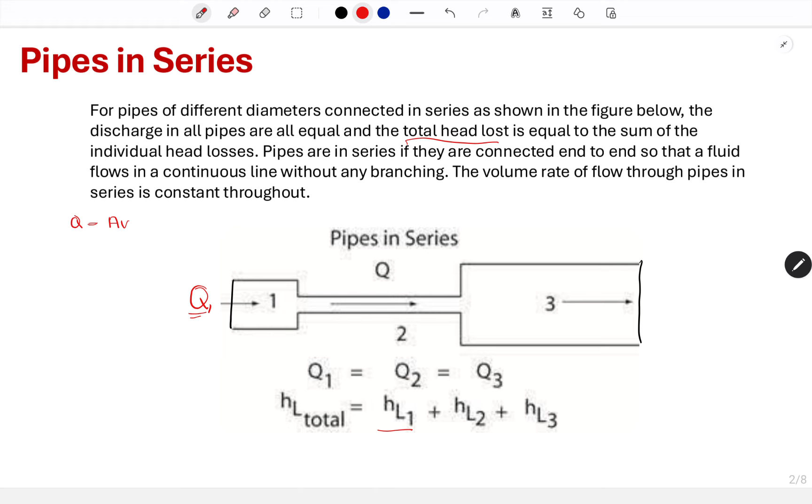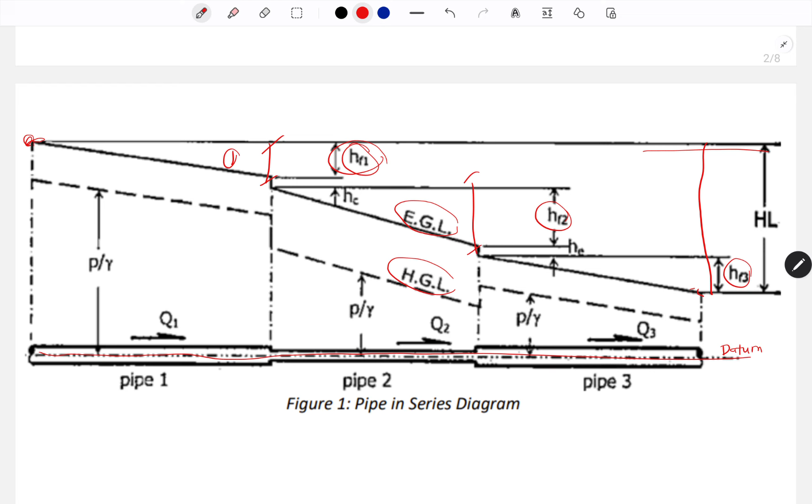So let's proceed with sample problem number 1. By the way, this topic under the hydraulics subject is very easy.

Let's proceed. Three concrete pipes are connected in series as shown - this is pipe 1, 2, and 3. If the rate of flow in the pipe is 0.10 cubic meter per second, first determine the total head loss of the pipe. Second, determine the length of the 200 mm diameter.

In our problem, a table is given with the properties of the pipes along with the friction factor. Since friction factor is given, which major head loss formula should we use among the three?

There's no other formula among the three with F, the friction factor, except the one we'll use here, which is of course the Darcy-Weisbach.

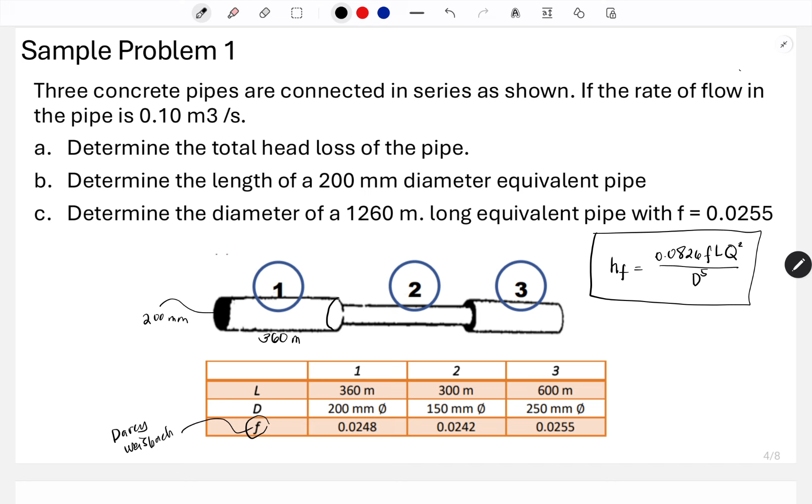For number 1, check this out. So first, what are we looking for? We need to compute for the total head losses.

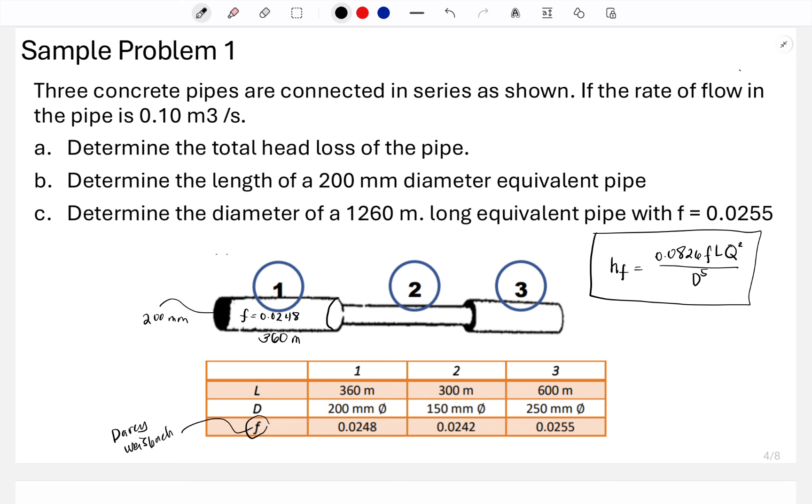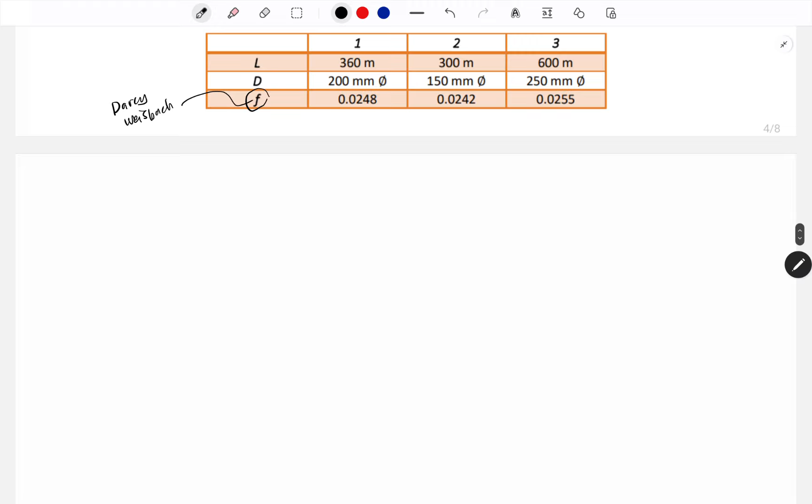For us to compute the total head losses, let's compute the individual head losses, which are HF1, HF2, and HF3. Let's put our solution here. Letter A, we have total.

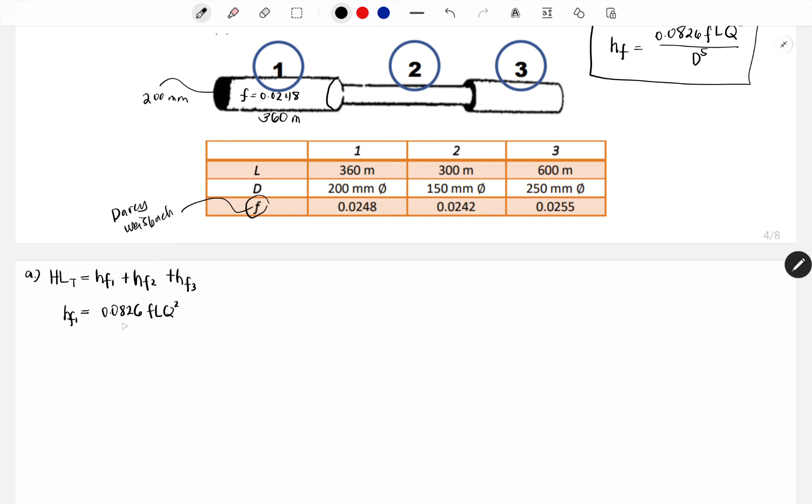We have HF1 plus HF2 plus HF3. So let me put the formula for HF1: 0.0826 FL Q squared divided by D raised to 5.

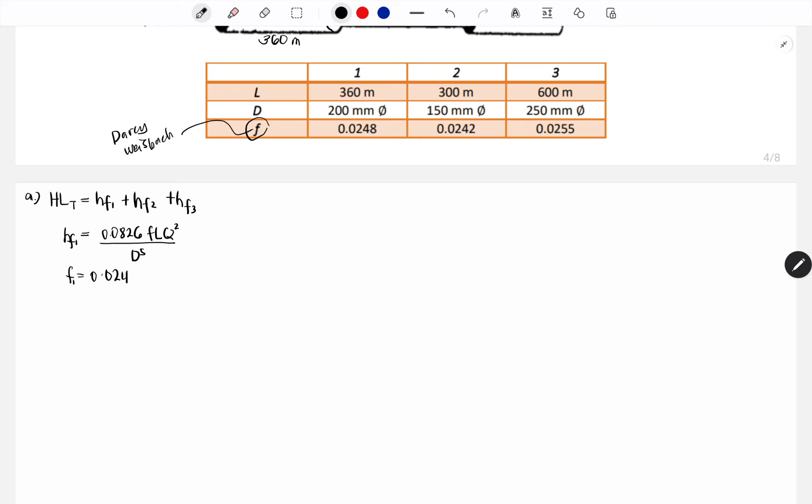So we have the givens: F1 is 0.0248, L length of pipe 1 is 360. For Q, we have a given that the rate of flow in the pipe is 0.10 cubic meter per second. Since this is series, Q1 is equivalent to Q2 and also equivalent to Q3, which is equivalent to 0.10 cubic meter per second.

So Q is equivalent to 0.10. And then lastly, the diameter is given as equivalent to 0.2 meters. So here, it's just direct substitution: we have 0.0826, F is around 0.0248, the length is 360 - make sure your units are consistent or uniform. 0.10, and in our case everything is in meters, so it should all be in meters. And then the diameter is 0.2 raised to 5.

So in our case, we can compute HF1 that is equivalent to 23.05 meters. So let's compute the rest, and I'll just put the answer here.

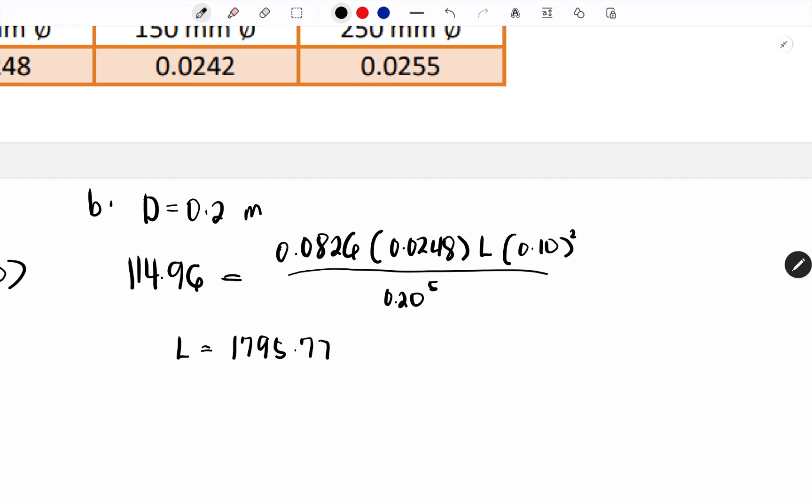This is equivalent to the formula of Darcy-Weisbach. The F we'll be using is 0.0248, since this became its equivalent - so let's use this too. But if there's a different given, that's what we'll use instead. The length is unknown, and the Q is the same, squared, and then 0.2 raised to 5. So L is equivalent to 1,795.77 meters. That would be the answer for letter B.

And lastly, letter C: determine the diameter of the 1,260 meter long equivalent pipe with friction factor 0.0255. Again, let's use our equation - the formula we'll use is head loss, since it's still an equivalent pipe. What we're looking for now is the diameter. So we have 114.96, and we're given the length - that's what we'll use - the length is 1,260, and the friction factor given is 0.0255.

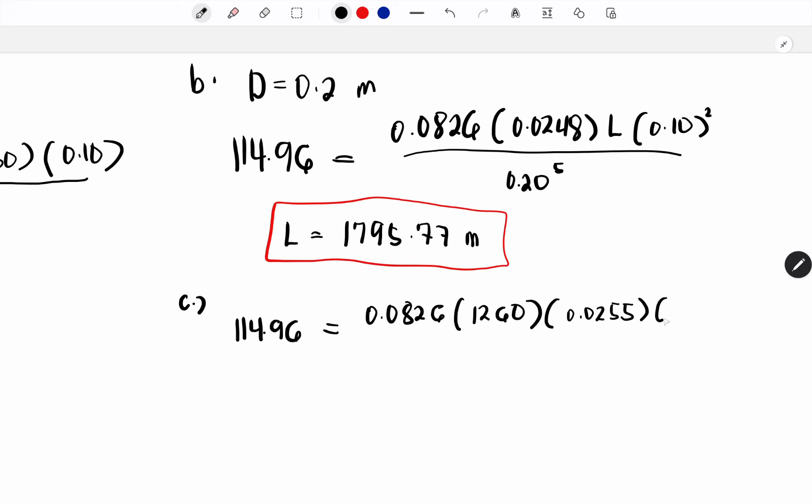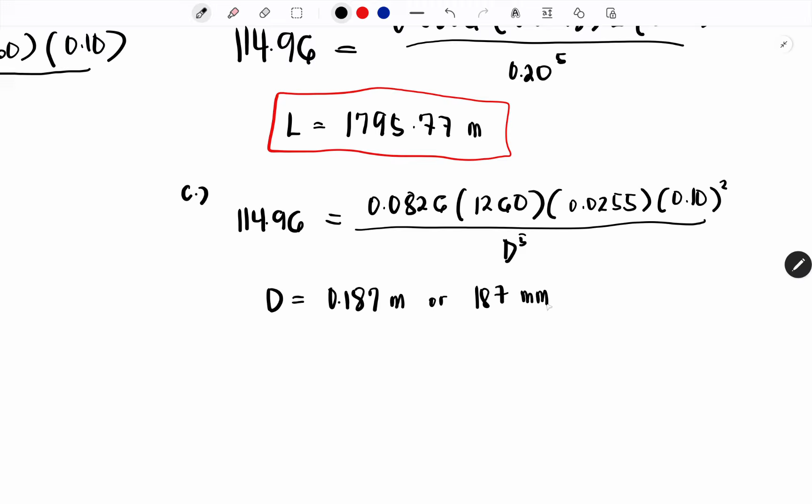And the Q is the same, so diameter raised to 5. If you solve or simplify, we get the answer of 0.187 meters or 187 mm. So that would be the answer for letter C.

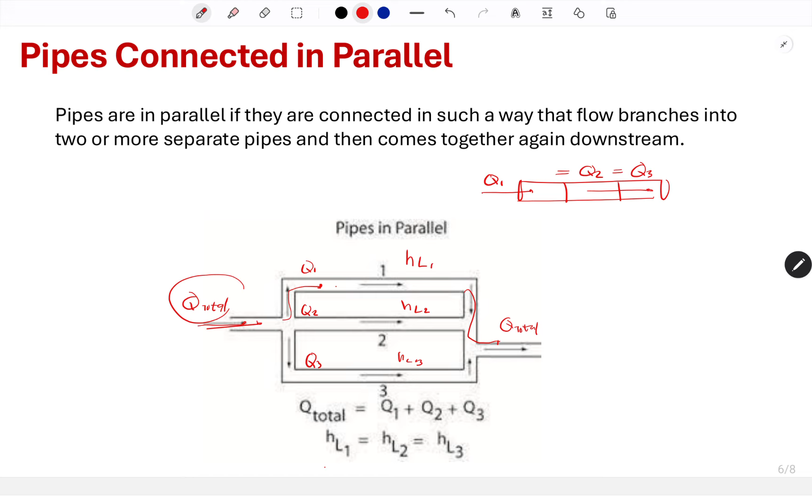So let's proceed with sample problem number 2. Let's just put up the page.

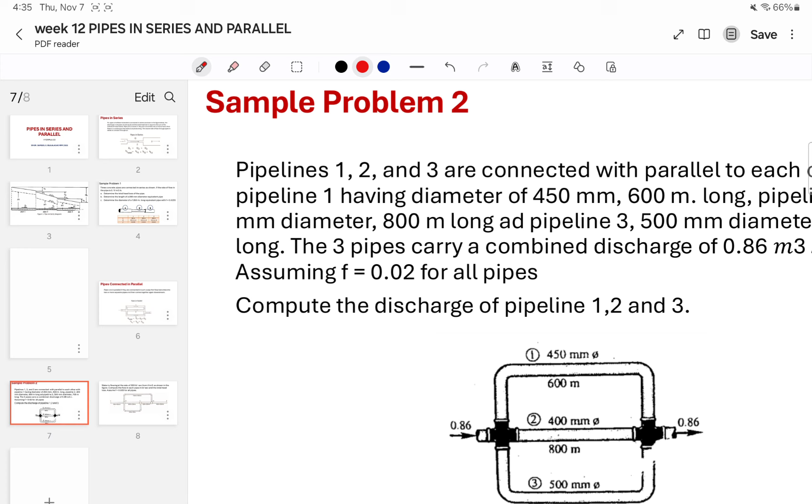So, the pipelines 1, 2, and 3 are connected in parallel. So we have a parallel figure. We just need to compute the discharge of pipeline 1, 2, and 3. But there's a value already given - we have 0.86 as the total discharge, 0.86 cubic meter per second.

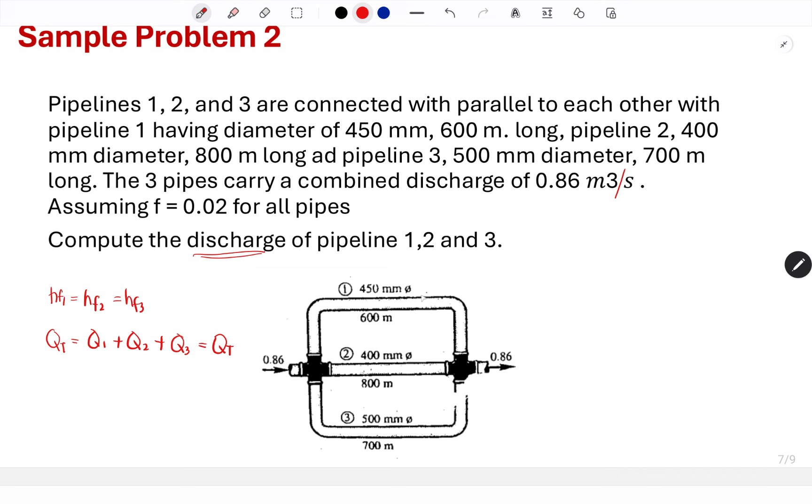So we need to compute the discharge, using the formula we discussed earlier. We have the total head loss, or the head loss at 1, equivalent to head loss at 2 and head loss at 3. And the Q total is equivalent to Q1 plus Q2 plus Q3. So how do we use this to compute the head losses in each pipe, and the discharge in each pipe? Let's write our formulas first.

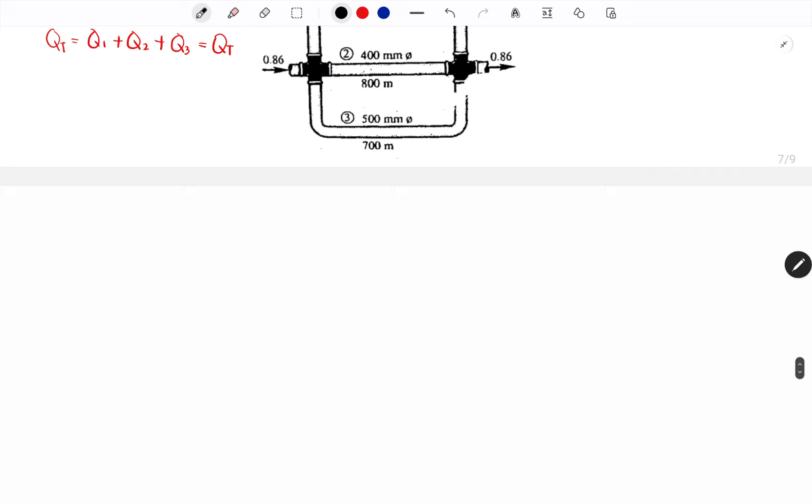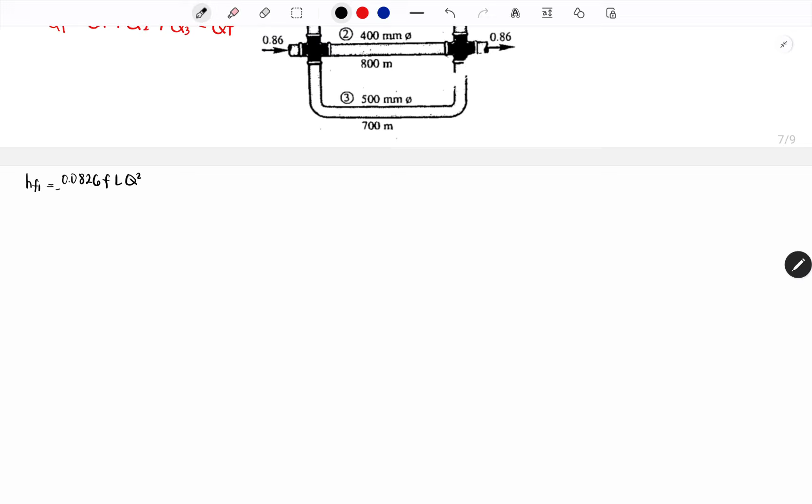Since we have a friction factor, we'll use the Darcy-Weisbach formula again. Let's write the head losses. Head loss at point 1: 0.0826 F L Q squared divided by D raised to 5. Next, HF2: 0.0826 F L, Q1... this is Q2 squared divided by D raised to 5. And lastly, 0.0826 F L Q3 squared, raised to 5 again.

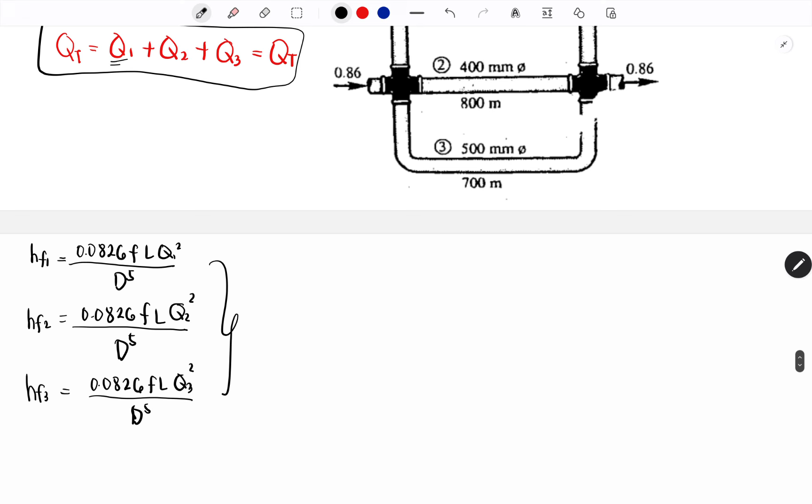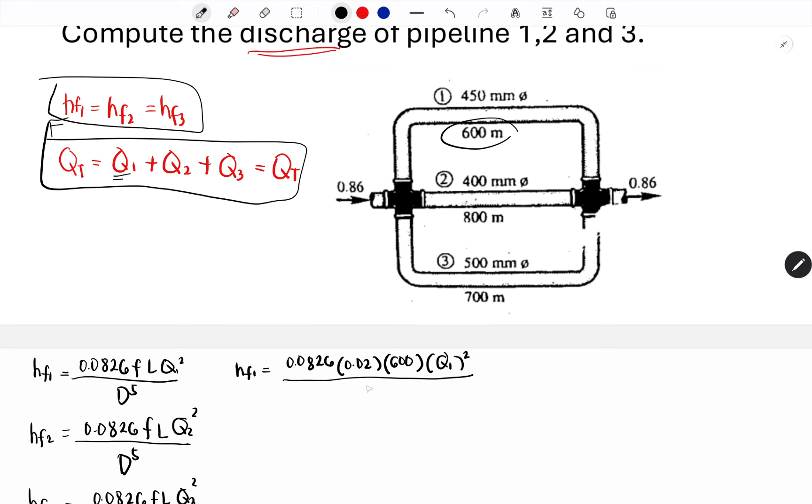So let's show the magic here. Let's put for HF1: 0.0826, F is equivalent to 0.02 for all pipes, the length is here - we have 600 meters, and Q1 squared, D raised to 5. The diameter is 0.45, raised to 5.

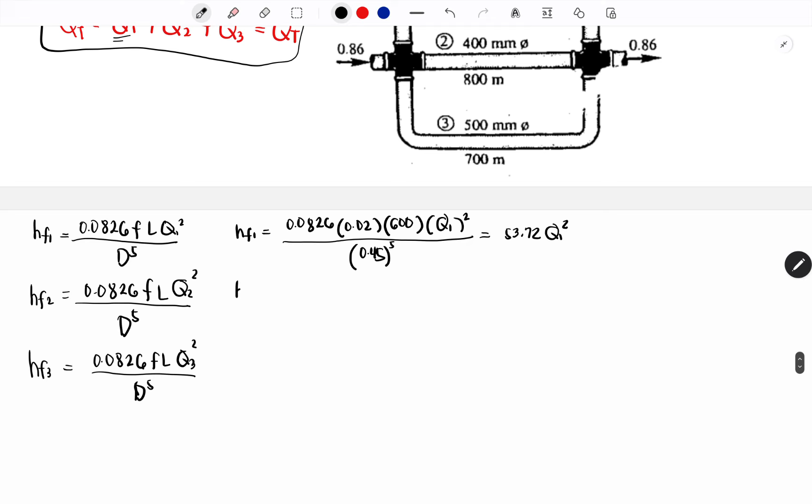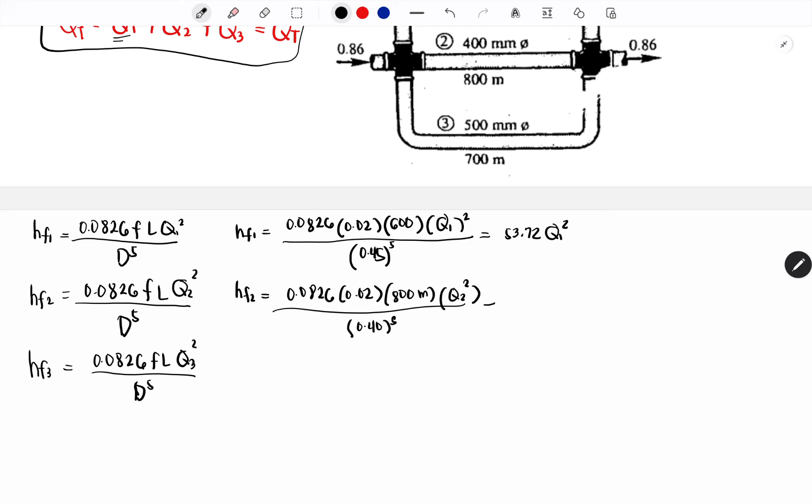Same for head loss number 2 and head loss number 3. 0.0826, 0.02, 800 meters, and Q2 squared. Next, diameter 0.4 raised to 5. Let's compute this - we get 129.06 Q2 squared.

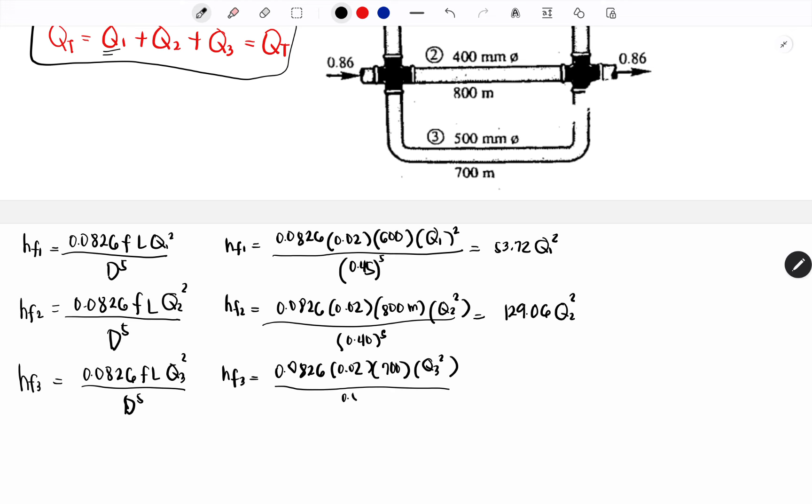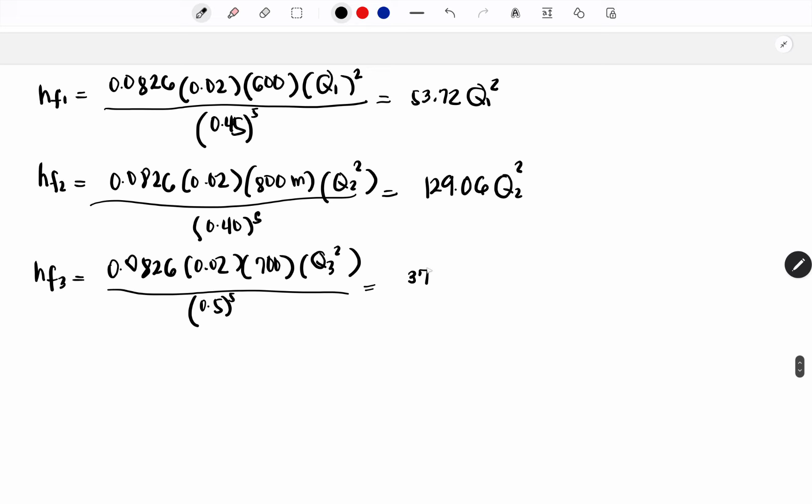Lastly, let's write 0.02. The length is 700, and we have Q3 squared over 0.5 raised to 5. So we have here 37 Q3 squared. So we have the equations in terms of Q1, Q2, and Q3.

So next will be putting these equations together, since HF1 is equivalent to HF2 and also equivalent to HF3. So if HF1 has the value 53.72 Q1 squared, we also have HF2 as 129.06 Q2 squared, and then 37.0 Q3 squared.

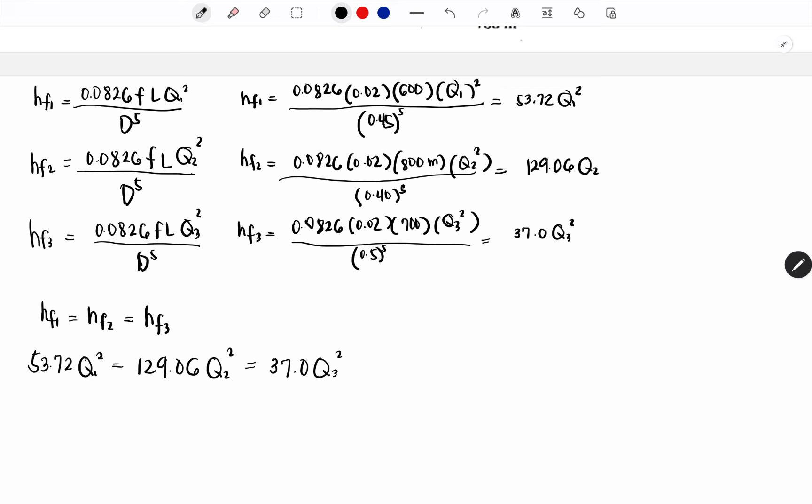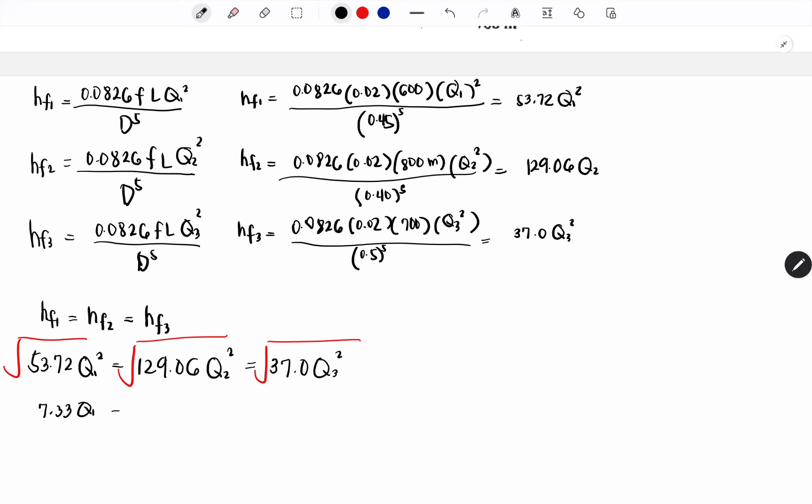So first, let's remove the squares - we take the square root. The result: we have 7.33 Q1, and then 11.36 Q2, and then 6.08 Q3. You can store these values, no?

And then we have Q1 plus Q2 plus Q3 equivalent to Q total. And our Q total is equivalent to 0.86 based on our problem.